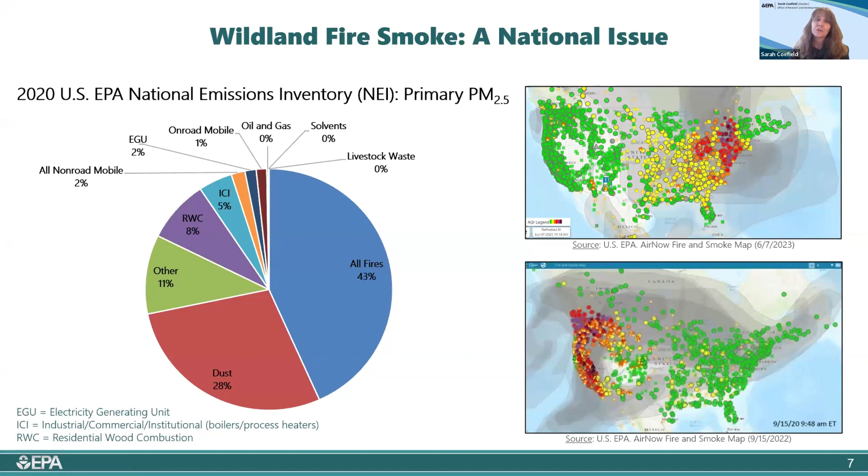We know that land management agencies, including the Forest Service and Department of the Interior, are working to increase prescribed fire on the landscape to hopefully reduce catastrophic wildfire. So we expect to see contributions from prescribed fire to increase in the coming years.

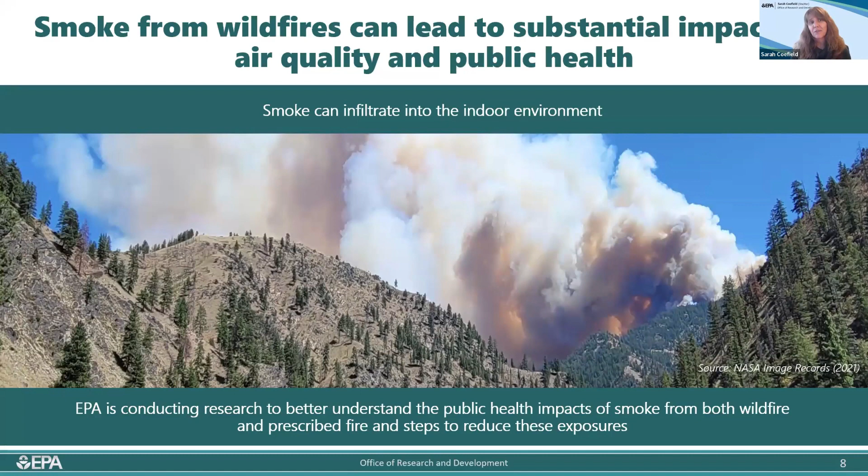Smoke from wildland fires can lead to substantial impacts on air quality and public health. The following slides provide highlights of a few wildland fire smoke research activities led by EPA scientists and engineers. EPA's key wildland fire smoke research topics include better understanding wildland fire smoke emissions, characterizing air quality impacts, better understanding health and ecosystem impacts, and working to improve risk communication and interventions to reduce smoke exposure.

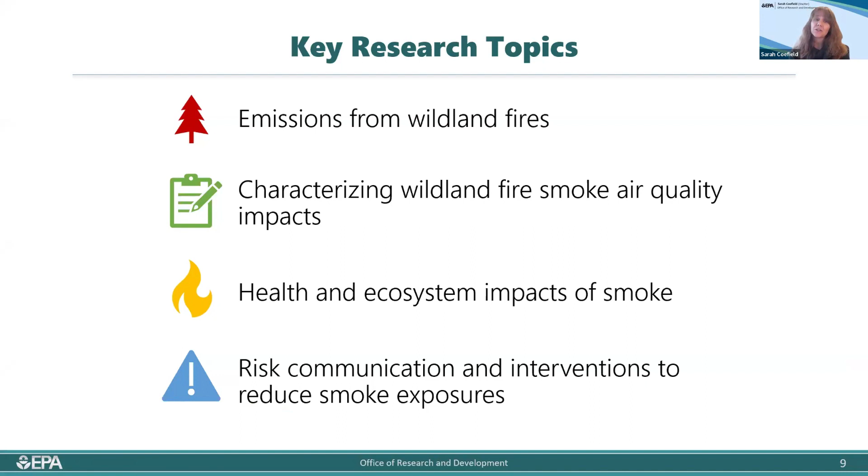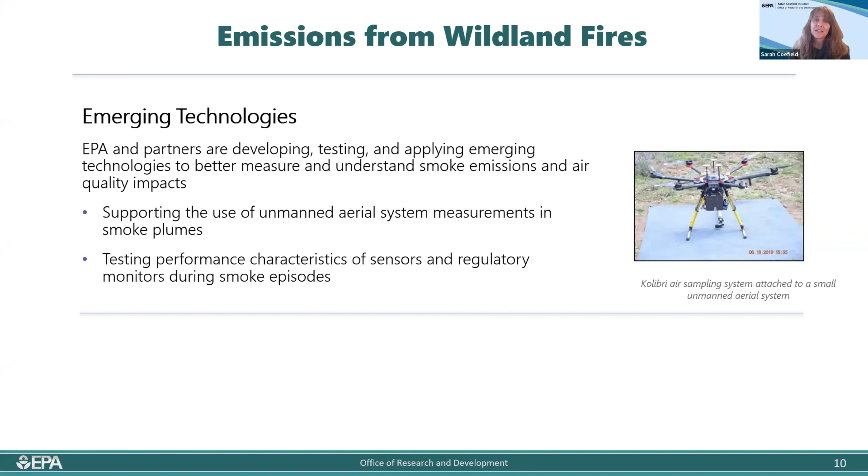EPA and our partners have been involved in various activities to better measure and improve our understanding of smoke emissions and air quality impacts. This has included working with emerging technologies to support the use of unmanned aerial system measurements in smoke plumes and testing the performance characteristics of sensors and regulatory monitors during smoke episodes. Next slide.

Additional emissions work includes gaining a better understanding of wildland fire emissions through controlled burn experiments under different combustion conditions. This allows for more accurate exposure assessments and an improved understanding of wildland fire contributions to ambient PM2.5. EPA has also conducted work to gain a better understanding of multi-year fire activity and emissions inventory data as part of EPA's Air Quality Time Series, or EQUATES project, to help inform air quality management strategies. Next slide.

Regarding characterizing air quality impacts, the spatial coverage of PM2.5 monitors has led to challenges in communicating air quality during smoke events. Traditionally, the communication of air quality conditions to the public through the Air Quality Index, or AQI, relied solely on data from regulatory monitors, which tend to be sited in urban areas, which is not necessarily where the smoke tends to be. To increase the spatial coverage of monitors, EPA, in collaboration with the U.S. Forest Service, developed the Fire and Smoke Map, which incorporates data from PurpleAir sensors with regulatory monitor data. And this improves our ability to communicate air quality conditions during smoke events.

And while useful, PurpleAir sensors are not as accurate as regulatory monitors. So ORD researchers developed a correction factor that allowed for the use of data from PurpleAir sensors in the Fire and Smoke Map. Next slide.

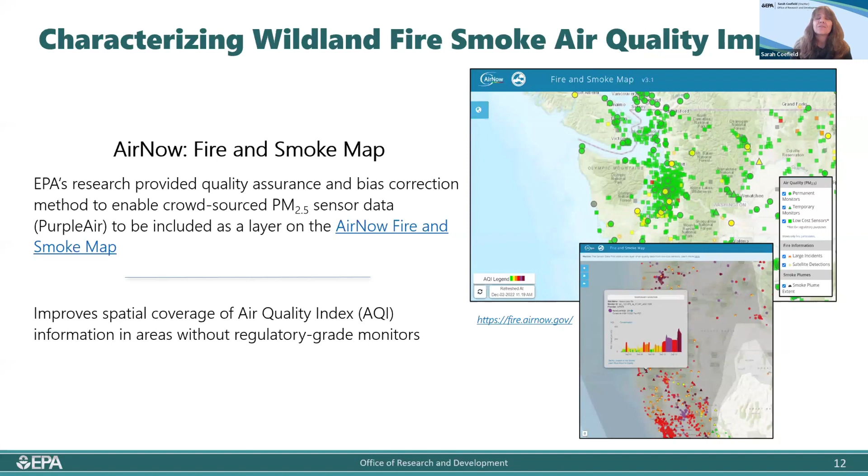Another recent effort to expand air quality monitoring capabilities during smoke events is ORD's Wildfire Smoke Air Monitoring Response Technology, or WSMART program. This is an air monitor loan program to support it.

Oh, can you go back? There we go. Thank you.

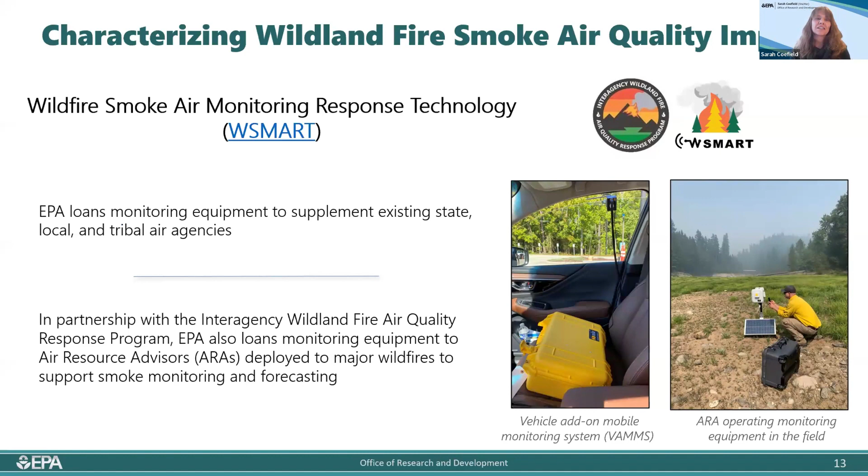All right. Sorry. This is an air monitor loan program to supplement existing monitoring by state, local, and tribal air organizations. The program was initiated in 2021 in support of White House and EPA administrator goals and is continued as part of ORD's Air, Climate, and Energy National Research Program. Okay, next slide now.

The second example is what we refer to as the CAIF report, or Comparative Assessment of the Impacts of Prescribed Fire versus Wildfire, and represents work we've done that spans the intersection of air quality and health. The CAIF report is an interagency assessment that was led by EPA and consisted of more than 50 scientific staff from EPA, the Forest Service, Department of Interior, and NIST. The scientists examined the air quality and public health impacts of prescribed fire and wildfire, focusing on 2 case studies conducted in Oregon and California.

The report shows on an individual wildfire basis, prescribed fire can reduce the size and intensity of a future wildfire, but prescribed fire also results in air quality and public health impacts. Because of the focus being on 2 case study areas, the results of this assessment are specific to both those areas and cannot be extrapolated to the regional or national scale. Next slide.

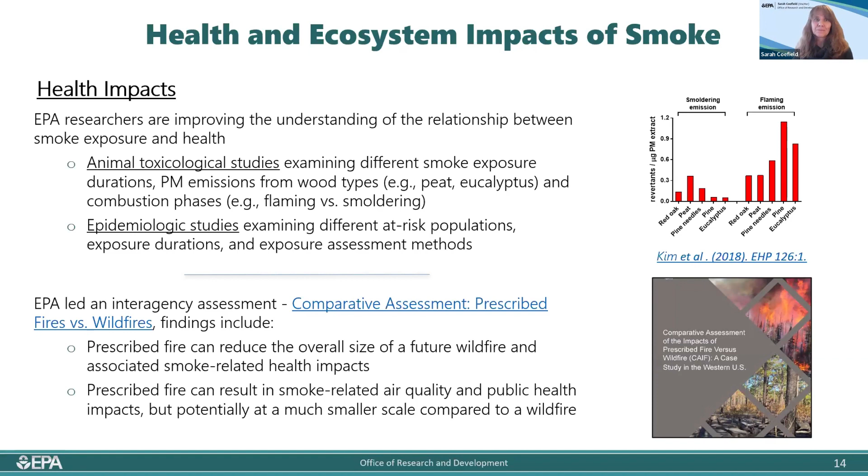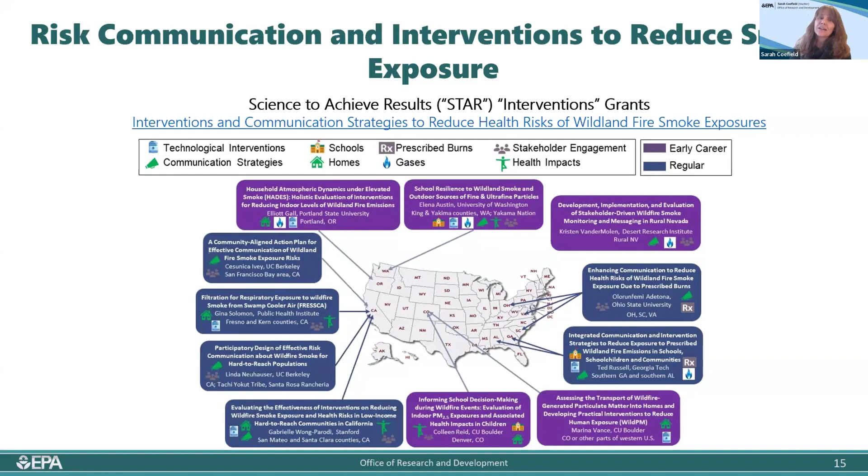To support research into wildland fire smoke risk communication and interventions to reduce exposure, EPA recently awarded STAR grants to researchers across the country. The results from these studies will help inform the creation of effective risk communication and intervention best practices. Next slide. And EPA currently provides resources online for public health outreach and preparedness, including continuing medical education courses about particle pollution and wildfire smoke for medical professionals. Next slide.

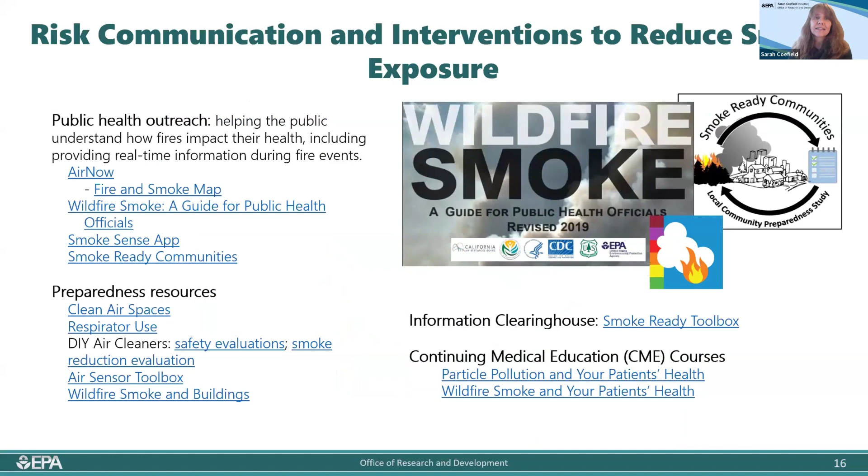This brings us to the Wildfire ASPIRE Study. The Wildfire ASPIRE Study is part of an initiative that emphasizes working directly with stakeholders to develop solutions to public health and environmental concerns. EPA started by asking stakeholders what wildland fire smoke questions were going unanswered, and partners, which included myself, as an air quality specialist at Missoula Public Health in Montana at the time, identified the fact that current public health guidance advises going indoors and closing windows and doors during smoke events, but we have little knowledge of how much smoke is still coming inside, particularly in larger commercial and public spaces where HVAC systems draw outside air indoors.

Additional questions for the project focus on identifying interventions that are effective for reducing indoor smoke exposures and related risks. The research has involved local partners from the beginning to identify what information they need to effectively communicate actions that building owners and the public can take to reduce public health risks during smoke episodes, and partners frequently to discuss plans, coordinate implementation, address needs and concerns, and discuss what deliverables would be beneficial. EPA worked with Missoula Public Health, the Hoopa Valley Tribal EPA, and the Central California Environmental Justice Network. Next slide, please.

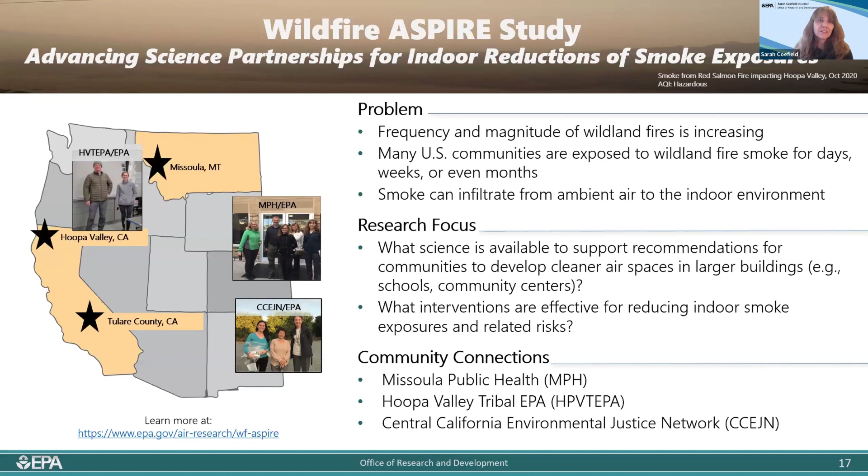The Aspire study has had multiple components. We started with a web-based summit that gathered federal, state, local, and tribal experts to quickly understand the state of science and work currently underway related to indoor air quality during smoke events. The webinar took place in 2019 and is available online. We then conducted field studies in Missoula, Montana, and Hoopa, California, to monitor indoor and outdoor PM2.5 concentrations in commercial and public buildings. This was followed by inspections by an HVAC expert to understand how building characteristics, ventilation systems, or occupant practices affect PM2.5 concentrations.

We've conducted laboratory studies to assess DIY air cleaners, and a newer project, Aspire Health, kicked off to evaluate DIY air cleaners' impacts on indoor air quality and human health in homes in Hoopa and Tulare, California. And we just wrapped up fieldwork on that study last fall. And this brings us to the prize-based challenge, which is why we're all here today. We launched this challenge to spur the development of low-cost, sustainable methods to reduce outdoor pollutants in homes during wildfire smoke or high pollution episodes. Next slide.

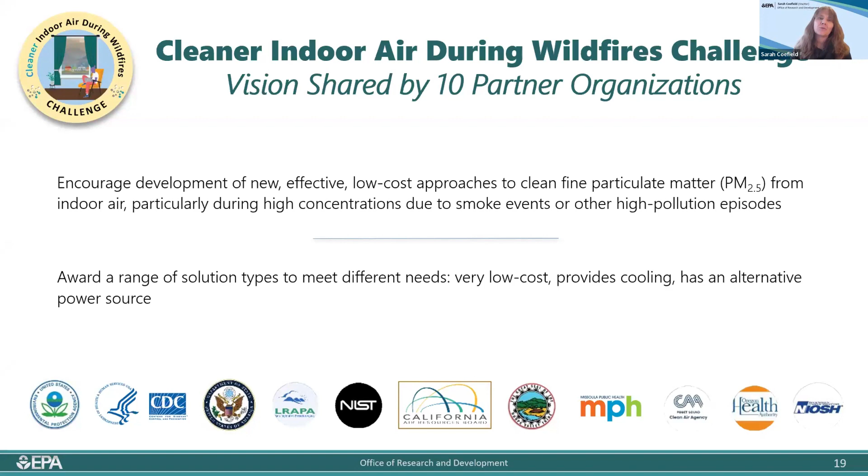Current air cleaning technologies have limitations that could be addressed through a prize-based challenge, including cost, performance, operation and maintenance requirements, noise levels, or reliance on power and a lack of air cooling. So EPA partnered with 10 federal, state, tribal, and local organizations to spur the development of new approaches or technologies to keep indoor air as clean as possible during periods when outdoor PM2.5 concentrations are elevated. Next slide.

The challenge was issued in 2 phases and focused on several specific criteria, ranging from price to noise levels, but the most important was the ability to remove PM2.5 during smoke and high pollution episodes. Phase 1 was a theoretical challenge, that is a design challenge requiring an in-depth written proposal, but not requiring development of a prototype. We announced the Phase 1 winners in 2021. We then invited the 5 Phase 1 winners and 3 honorable mention awardees to submit prototypes for evaluation in Phase 2. Next slide.

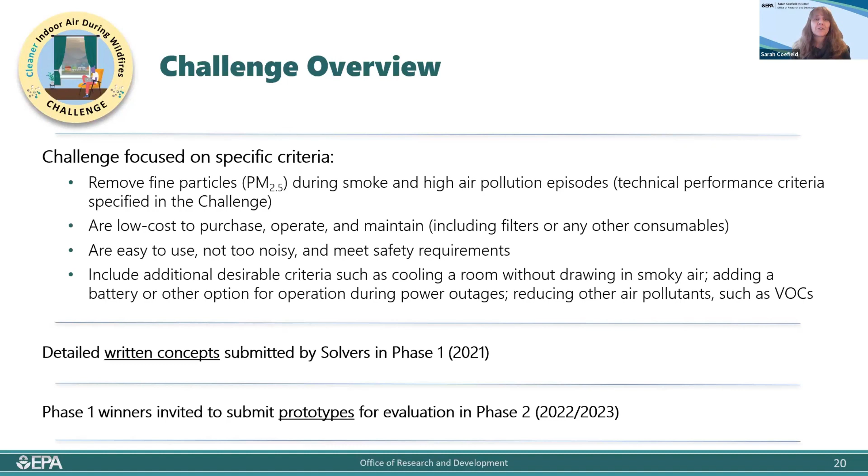The solvers participating in Phase 2 supplied the prototypes to EPA, and they progressed through a series of qualitative and quantitative tests. First, they were evaluated for disqualifications, including potential electrical, mechanical, or chemical hazards, and ozone generation at or above 50 parts per billion. Disqualified prototypes were not evaluated any further. Prototypes that did not demonstrate hazards or ozone generation above 50 parts per billion were evaluated for the must-have and desirable criteria. Next slide.

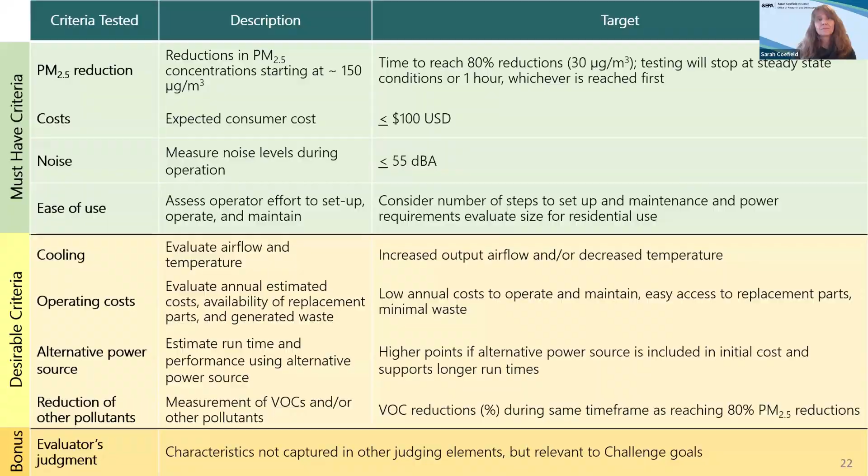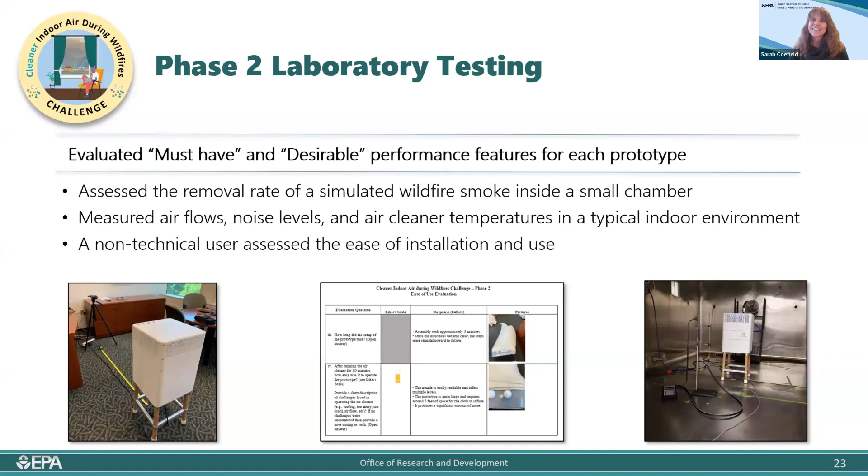EPA scientists evaluated the must-have and desirable criteria for each prototype. Pollutant removal was tested in a small chamber, and airflows, noise levels, and air cleaner temperatures were measured in a typical indoor environment, and we had a non-technical user assess the ease of prototype installation and use. Next slide. We summarized the results of the evaluations and provided them to the Phase 2 judging panel. The panel included indoor air quality experts, a product engineer, and public health, communications, and risk experts from federal, state, and local agencies, academia, and the private sector. Once judging was complete, we discussed those results with the challenge partners who helped design the challenge. Input from the judging panel and our challenge partners informed EPA's award decisions.

Next slide. Before we introduce our winners, we'll hear some thoughts from Jeff Williams from the California Air Resources Board. Jeff participated in the challenge as both a challenge partner and a judge. Jeff?

Great, thanks, Sarah. So I'd like to first thank EPA for organizing the challenge and the opportunity to be a partner in the development and judging process. It was really a pleasure working with the many challenge partners who helped in the effort and who lent their time and expertise to the evaluation of the submissions. I'd also like to thank the solvers who participated in this important challenge for all their time and effort.

So I got involved with the Wildfire Smoke Challenge when EPA staff reached out to me and other challenge partners for a great brainstorming session to develop the objectives of the challenge. I was personally interested in participating in the challenge because I live in California and I've experienced firsthand the serious wildfire smoke episodes that are affecting us all with greater frequency and intensity. The smoke from these fires is a significant health concern for affected communities, and so the need for effective and affordable air cleaning solutions has become increasingly important.

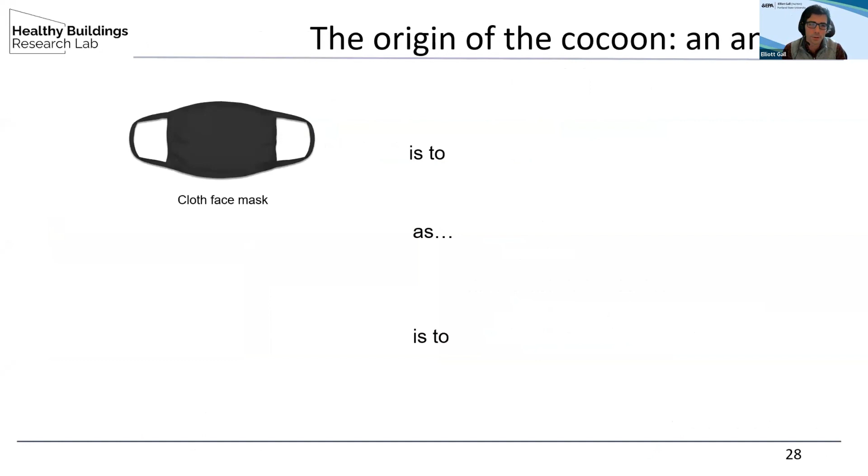So everybody likes analogies. Think back to the old school SAT here. I want to frame the context of our thinking for this solution with an analogy. So there's a couple of animations here. So go ahead and just click through. 4 pictures should appear. A cloth face mask is akin to an N95 face mask, as the cocoon is akin to an advanced 3-stage HEPA filter.

So as an indoor air quality scientist, at the advent of the phase 1 of the challenge, cloth face masks were a hot topic in my field of indoor air quality. A lot of questions, a lot of active research on this idea of using a cloth face mask to protect yourself and others from virus-containing aerosols. Obviously, that's a different solution than a highly engineered product like an N95 face mask.

What came out of some of the research that went on in the indoor air community about cloth face masks is people did find that fabrics that are commonly available can remove particulate matter. So that research is out there. I'm not here to talk more about that, but that thinking informed the initial inspiration and design of this device.

When this challenge came out, it seemed like a nice parallel to say, if people are finding out these cloth face masks can filter some fraction, not 95%, not 99%, but some fraction, can we leverage that same idea and create, again, an accessible, very low-cost air cleaner that serves a different niche than something like a 3-stage HEPA air cleaner that's highly engineered, constructed in a factory to specific tolerances, so on and so forth. We're looking to meet an emergency need with materials that people might even have on hand already. Okay, next slide, please.

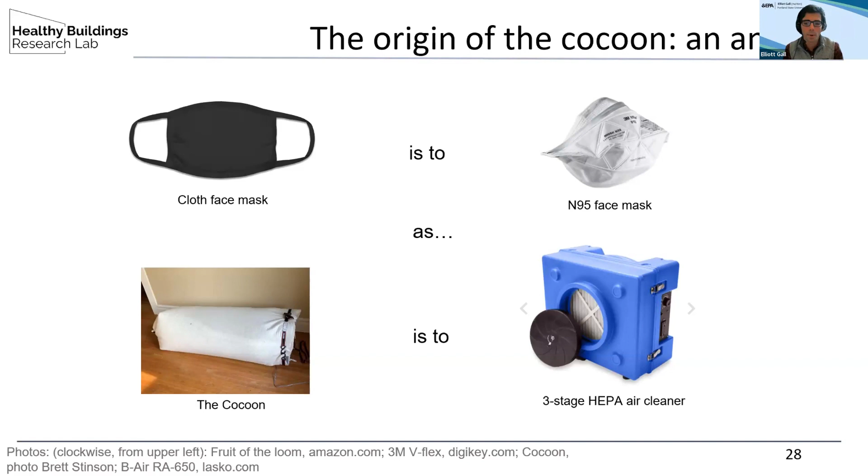So it acts very simply like a filter, a relatively low efficiency filter, but box fans move a lot of air, and we can recycle air through that filter many, many times and actually realize a decent overall effectiveness from this very simple solution. We're working through other design iterations.

It actually turns out that you can affix that filter to the box fan a lot of different ways. That part is relatively less important than this idea of getting an air moving device with some large surface area fabric material. We've tested cotton, and that's performed, at least so far, the most efficient. So get air moving through that cotton, and we can realize some air cleaning effect, which I'll show on the next slide, please.

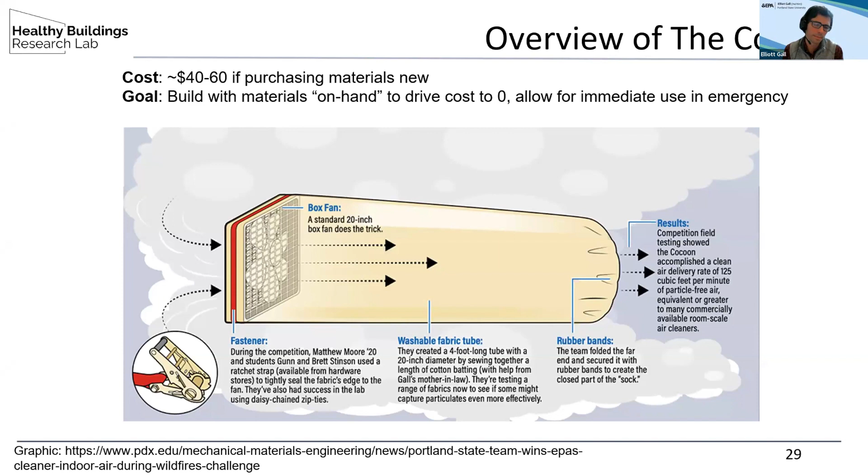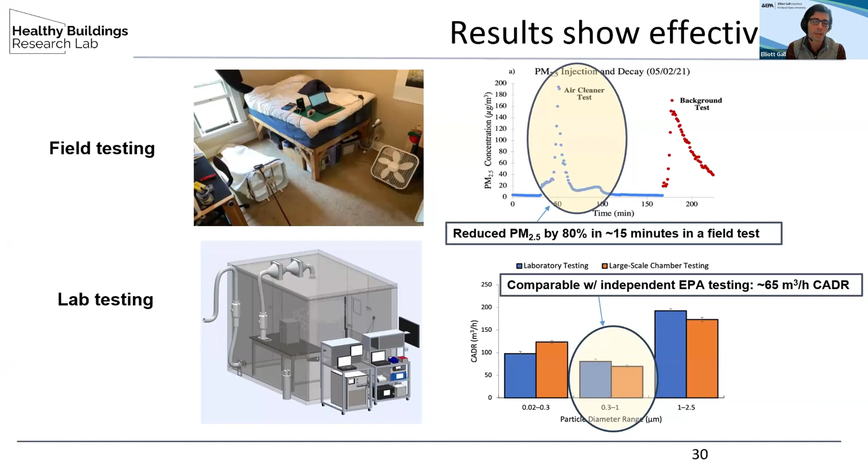Next slide, please. Okay, so what's next? Again, I'm thrilled and honestly humbled and very thankful to the EPA for hosting this competition and for being selected as a phase 2 winner. We have some plans for the prize funding here, and we're going to continue on this work. And again, I'm really appreciative of this because it can be difficult to fund this sort of practical, innovative work via other mechanisms, at least in academia.

So we want to test other household fabrics and look at different ways of constructing these devices. I think most households have fabrics, have fans. We want to come up with guidance that, again, allows people to do this using the things they already have. And so part of that is working with community partners to come up with ways of disseminating how-tos and information in ways that reach the people who might benefit the most from this.

One question we get a lot is, can you wash the fabric and how does it perform? We're going to study that. We haven't looked at it with the specific filters that we've studied, but again, in the context of cloth face masks, people have looked at that and shown that you can wash fabric and maintain removal efficiency. So we have a strong feeling that we will be able to wash these and reuse them following a smoke event. Again, a nice differentiation from the standard filter that needs to be thrown out.

The nice part about being in Portland, Oregon is we have a lot of outdoor apparel companies here. We want to try and work with those companies to come up with some solutions that might be scalable and very low cost. So, get these filters produced at scale so that we might be able to disseminate them in advance of the summer wildfire season.

Yeah, so thanks again for this challenge. We're so thrilled to receive the award. My name is Sissi Liu, CEO and co-founder of Metalmark Innovations. We're the inventor of the world's first self-renewing air cleaner.

So last May, headlines of wildfires and smoke activity started to top the news. At the time, smoke maps already showed a broad geographic coverage of poor air quality across the US and Canada. And the situation worsened by June when cities like New York were blanketed and became some of the most polluted cities in the world, including where I live in the Boston area. So despite the efforts by the US, led by agencies such as the EPA, to reduce air pollution, climate change is creating more challenges than ever before. And according to the American Lung Association, more than a third of Americans currently live with poor ambient air quality. So this means to us that we must start adapting to the changing climate and making our buildings more resilient and in a sustainable manner.

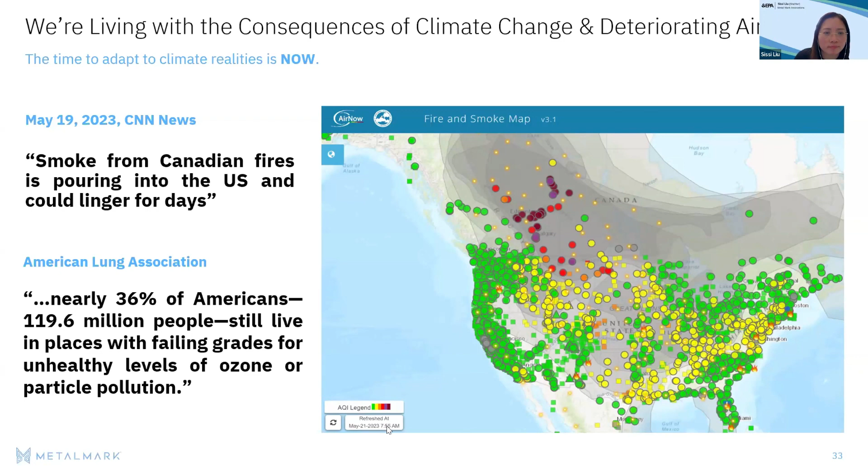And the closer you are to the fire source, the smaller the particles. But even at locations thousands of miles away from the fire source, such as Boston when smoke traveled from Canada last year, or in Greece, recent studies have shown the smoke particles still remain below 500 nanometers. And what makes the particles particularly problematic and a major health risk are their diverse chemical components and their dynamic transformations. It's been associated with increased hospital admissions, cardiovascular and respiratory diseases, mental disorders, and such. It has also been shown to increase fungal infections such as valley fever. And so it's a really concerning development that we all have to start paying more attention to.

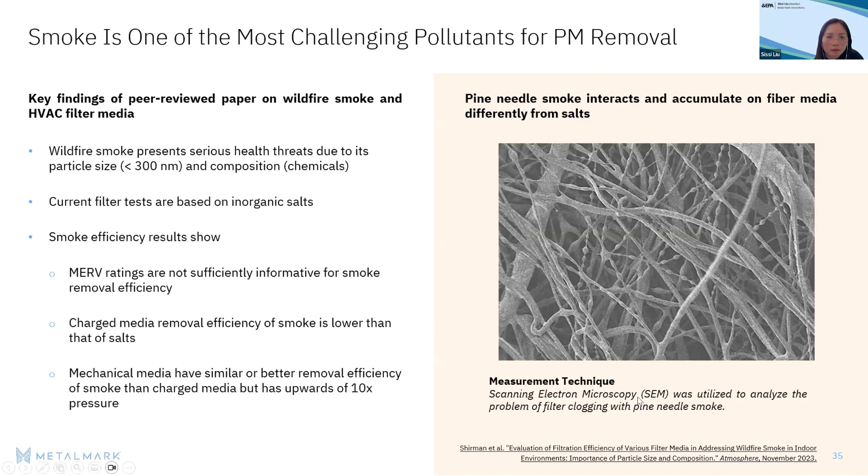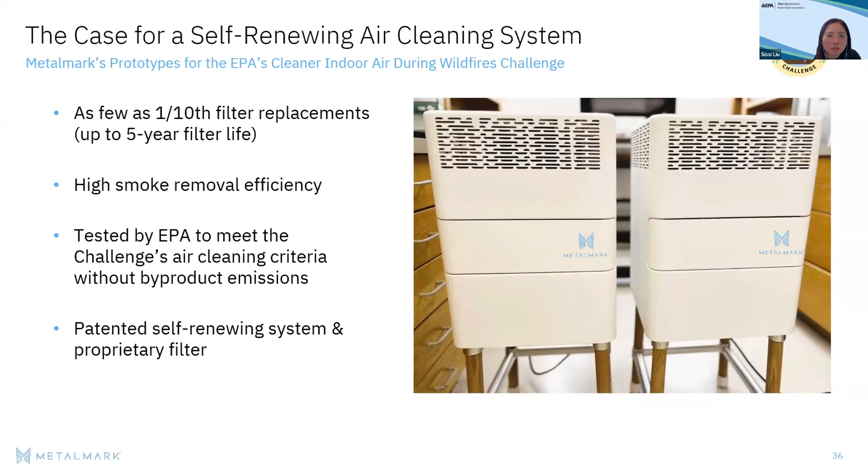Under normal usage, the filter could last up to 5 years. Since our submission to the challenge, we received the patent for our unique air cleaner, and we rely on the same technology concepts to design the Tatama, which targets commercial building applications, whereas the challenge was geared towards residential use. In the Tatama, we were looking to balance the needs for better indoor air quality and building energy use.

Each Tatama covers about 1,000 square feet with up to 3 air changes per hour, and it's ideally suited for schools, offices, medical facilities, and more.

The Tatama's patented technology includes a 2-stage process, and again, this is exactly what we did in the EPA challenge as well. In stage 1, direct air filtration removes indoor pollutants. Based on third-party testing according to AHAM standards, our system achieves 350 to 360 CFM of virus, bacteria, and smoke clean air delivery rates, CADR. We're working to further improve that.

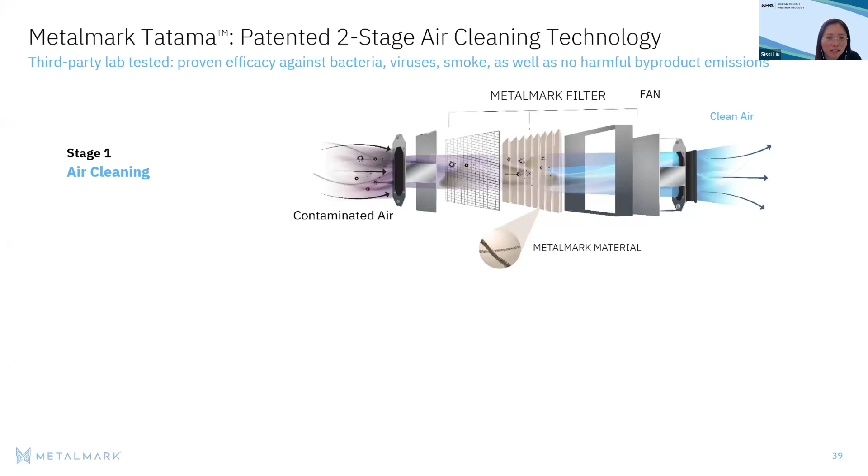In stage 2, around just once per month, the system self-renews the filter. Particles trapped are decomposed so that the filter's pressure drop is partially recovered. The catalysts on board break down gases formed during the process to prevent any harmful byproduct release.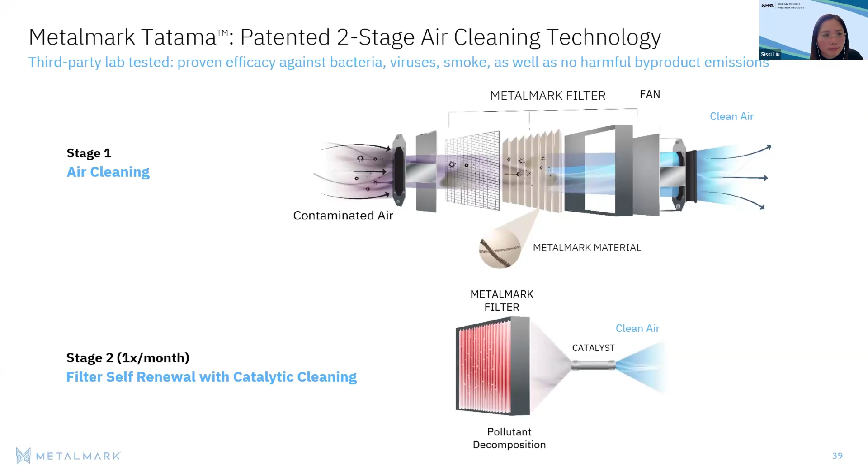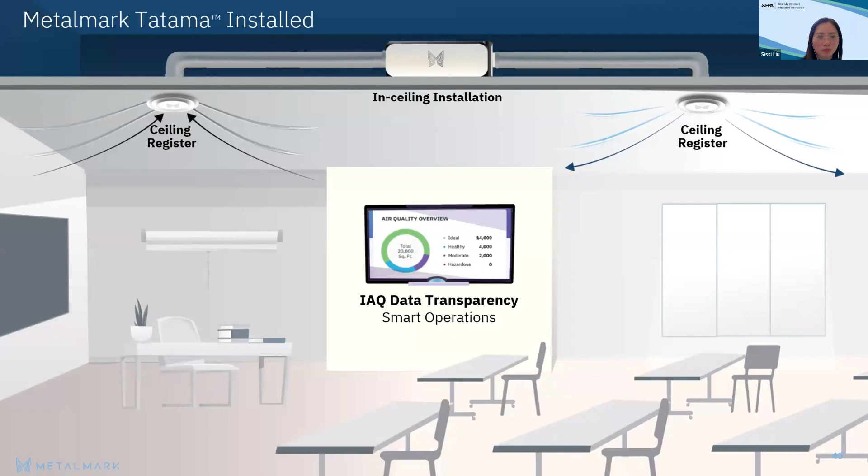The Tatama is ceiling mounted and self-ducted to achieve optimal air cleaning flow regime and avoid introducing appliances that take up room on the floor or walls. So it's really ideally suited for retrofits, especially in older buildings with limited options for HVAC upgrades, but it's also equally designed to suit new builds and architectural installations.

This smart, distributed, and targeted IAQ approach helps to reduce HVAC ventilation energy use, which is one of the biggest drivers for building HVAC energy. It's ultra low maintenance and cost effective. We have environmental sensors built on each unit to gather real-time IAQ data to provide customers with insights through our apps. The data also enables smart operations across the network of units at a building and campus scale. Our systems have been customer installed at multiple sites, and we're very excited to introduce it to market.

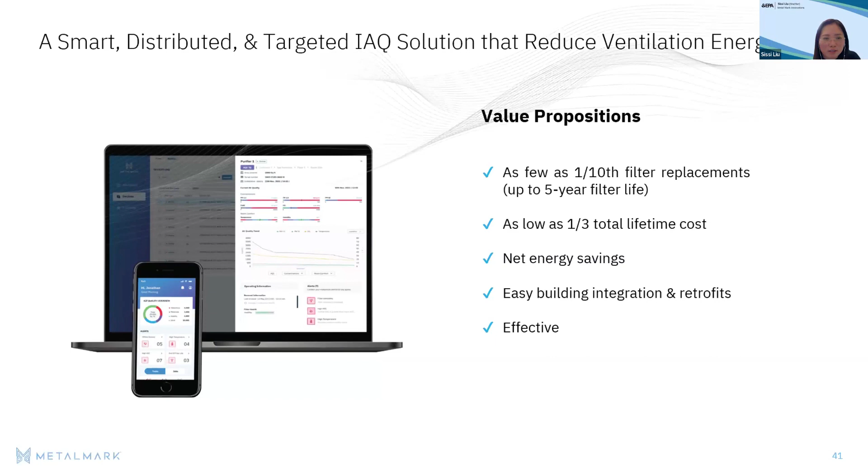If you have any questions, please contact us by email, or I can take questions during the Q&A session. And that concludes my presentation.